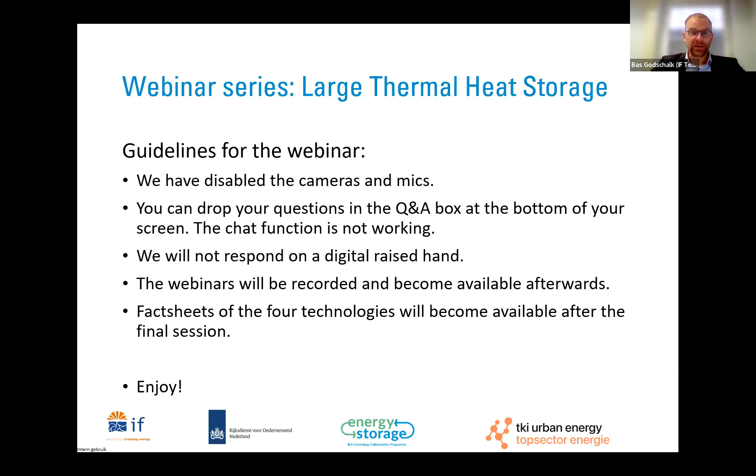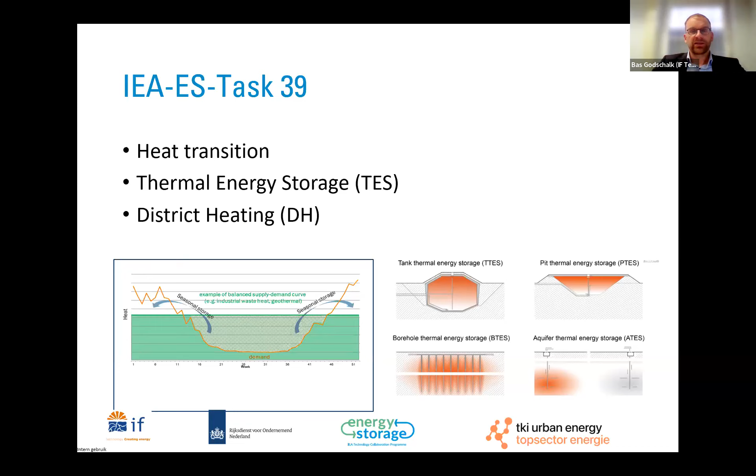This last session deals with the tank thermal energy storage system. In the previous session we went into the aquifer, borehole, and pit thermal energy storage systems, all technologies which are very relevant in balancing the heat supply and heat demand, as you can see in the figure on the left. Our presenters for today will explain why it is important and which role tank storage can play.

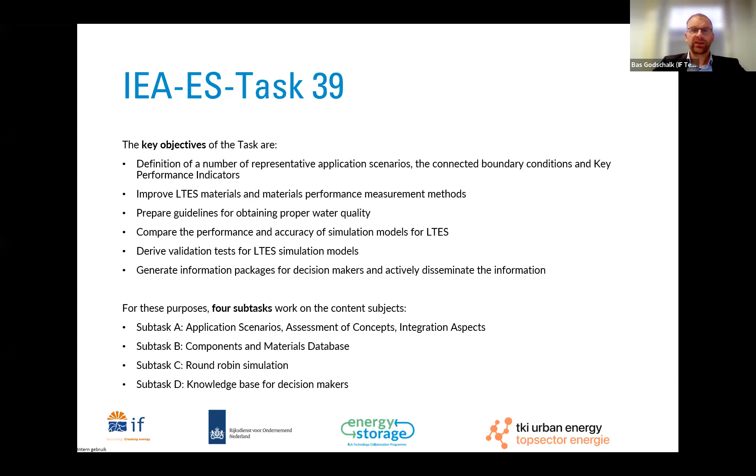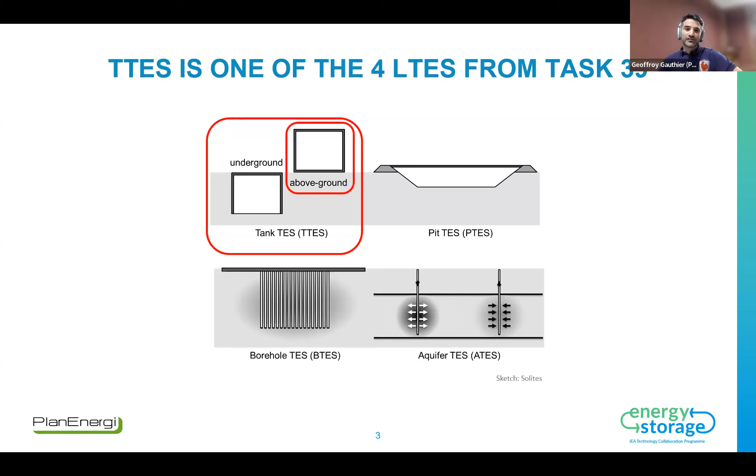Tank thermal energy storage is one of the four main large thermal energy storages, which are defined in our task as sensible thermal energy storages, with no phase change material involved. They are designed to store at least 1 gigawatt hour of heat per year and at atmospheric pressure, so no pressurized systems are included. The stored heat should be suitable for discharge into district heating networks. This presentation will focus on above ground tank thermal energy storages, which is the most common kind, and Ruud will then present underground tank thermal energy storages afterwards, but I will focus on above ground as mentioned.

So what is a TTES? It's basically a giant thermos, and it's built in five main steps. The first step is building the foundation of the tank to make sure that it sits perfectly on the ground. Then you build the roof of the tank, and then you build from the top down, one level at a time.

You build one level, and then you lift it up, and then you build the next level. The third step, running in parallel to the second, is to build diffusers inside the tank to let water flow in and out of it.

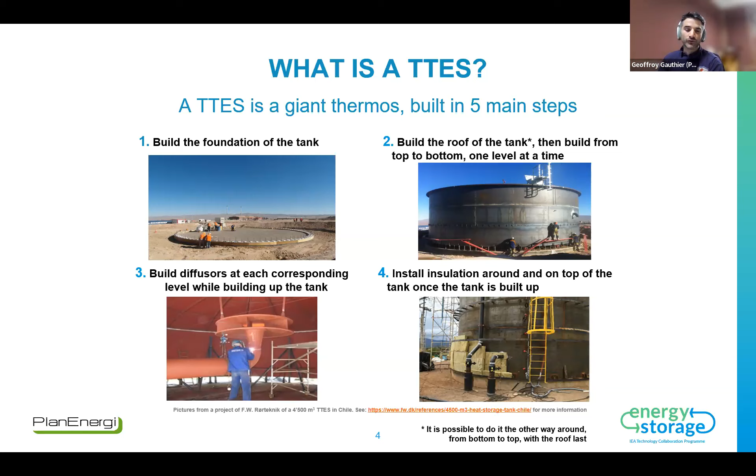Then finally, you install insulation around and on top of the tank to ensure limited heat losses. The last step is to put cladding around the tank so the insulation material is protected, but it's also an opportunity to decorate the tank and integrate it into its environment. So these are the five main steps for building a TTES.

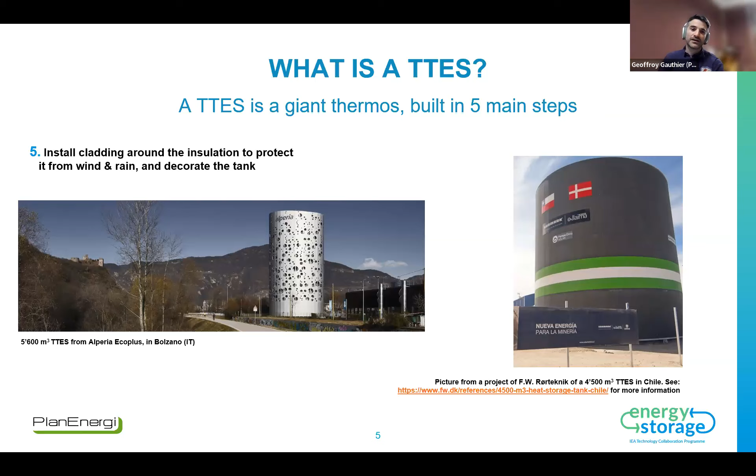In Denmark, and I'll start with the Danish point of view, TTES are basically everywhere and are usually coupled to biomass boilers, waste incinerators, and CHP plants, enabling flexible use of those heat production units. They are connected to big district heating networks.

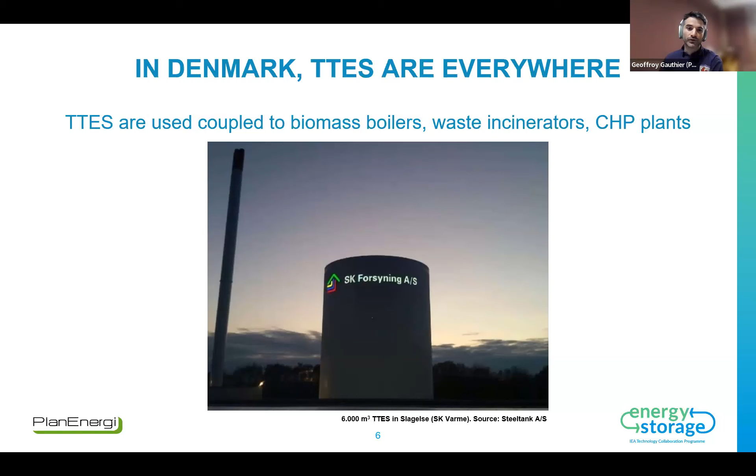That's not the only place we find TTES in Denmark. They're also found in solar district heating systems, which are a Danish specialty. In Denmark, there are 1.6 million square meters of solar district heating collectors installed - solar thermal collectors connected to district heating.

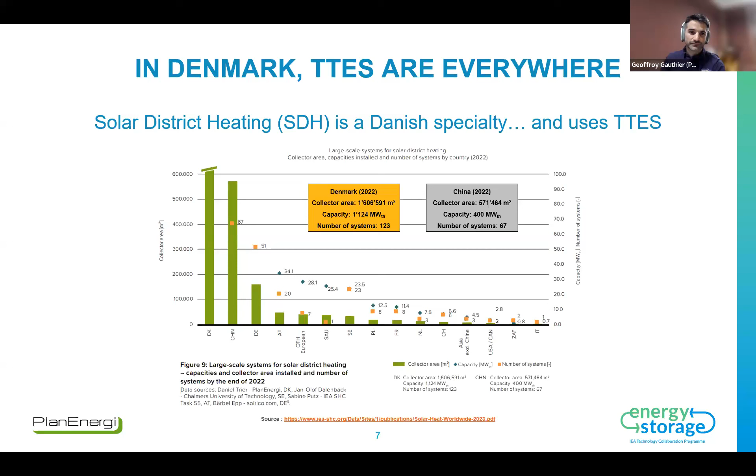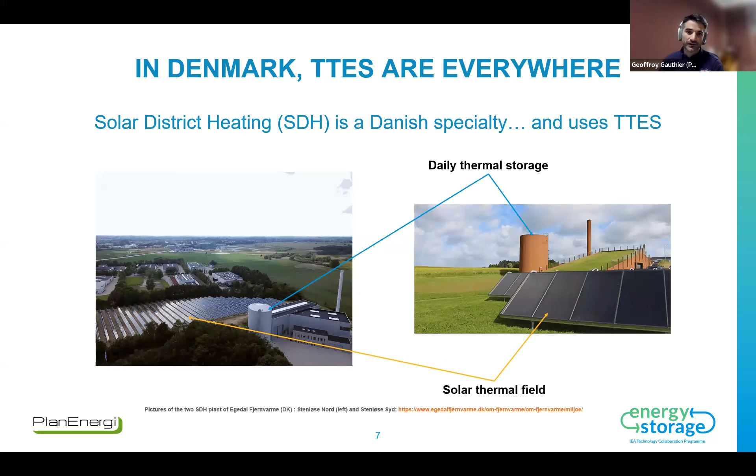It's usually very large installations, and as you can see on this graph, Denmark is at the top here on the left. An installation like this is characterized by a solar thermal field, shown here at the bottom. These are examples of a project in Denmark, almost always with a daily thermal storage to make sure production corresponds to the consumption of heat.

So why large thermal energy storages for district heating? I've mentioned district heating a lot already, but why do we have these large thermal energy storages? Well, first of all, it's because heat is inexpensive to store at large scale - we're speaking of 10 euros per kilowatt hour, less than 1 euro per kilowatt hour at large scale.

Here you see the graph, showing how the specific cost of thermal energy storage evolves when increasing the size. This is for an individual house on the left, 160 liters. If you go to district heating size, several thousand cubic meters, you fall down by a huge factor. This is why it's interesting to go for large thermal energy storages - they're bigger, better, and cheaper.

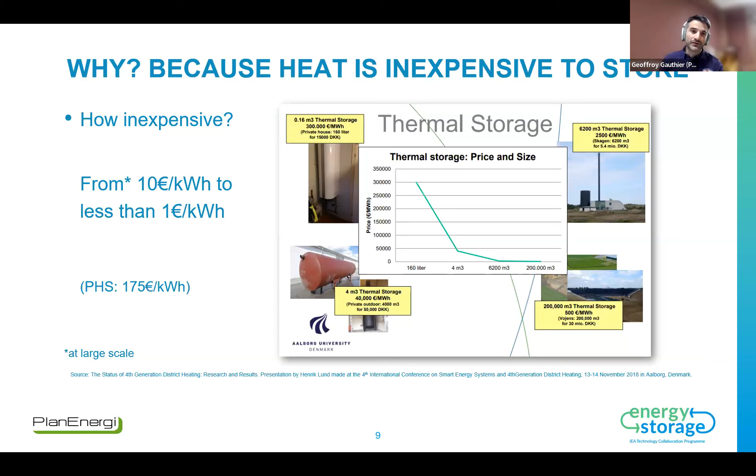In comparison, pumped hydro storage is much more expensive. It never goes under 100 euros per kilowatt hour of storage capacity.

Another point about large thermal energy storages is that they enable the use of renewables. They provide flexibility in district heating systems - I've already shown examples in Denmark. They increase the share of renewables in the system and the use of waste heat. They can help with peak shaving. Larger storages are needed to serve district heating systems and other large-scale applications such as industrial, and they help further reduce specific costs of renewables and primary energy use.

In that sense, there is another task called Task 55, also from the energy storage IEA task. In this task, we've shown that using thermal energy storage, or doubling the amount of thermal energy storage, will help save a lot of primary energy consumption. So in these ages where we're really trying to reduce our consumption of primary energy, it's a very good tool to have.

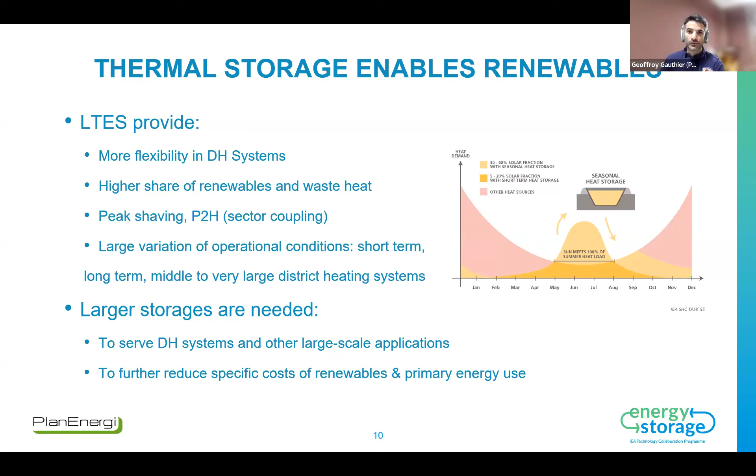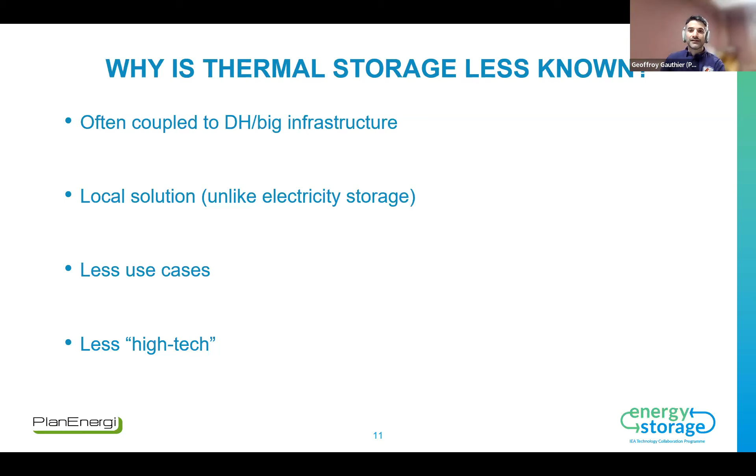Then the last general question about large thermal energy storage: why is it less known? Well, often it's coupled to district heating or big infrastructure, so it's usually far from city centers. It's a local solution, unlike electricity storage, so there isn't much international debate about this topic. There are fewer use cases - one storage is enough to cover huge demand, which is why we see them less, and it's less high-tech. Some would even say it's less sexy, but I would disagree with that.

I think this tank thermal energy storage here in Germany is quite sexy.

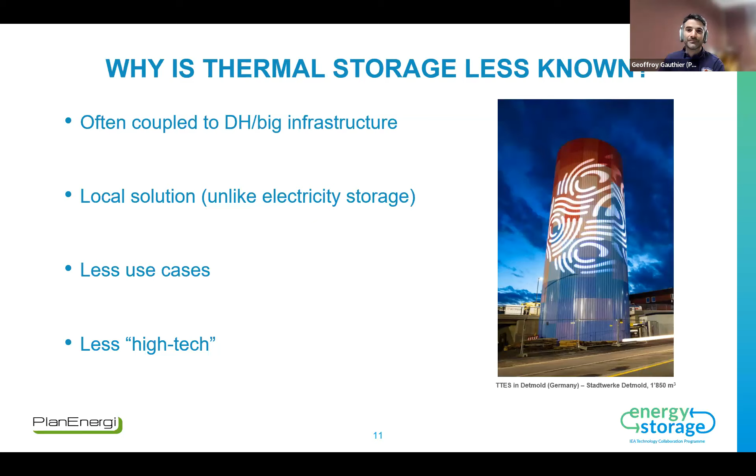Now going to the advantages of specifically tank thermal energy storages. First of all, it's a very simple solution, and it has many advantages. It can run at high temperatures, close to 100 degrees if you have absolutely no pressure, just above 100 degrees if you use steam at the top of the tank, and 115 degrees if you use two-zoned storages, which is a specific kind of non-pressurized tank thermal energy storage.

These technologies are very low maintenance. They have a long lifetime, we're talking about 30 years at least. They have very high charge and discharge capacities of heat. Several hundred megawatts is already possible with this technology. It's very well known, it can be found basically everywhere, and there are little to no restrictions with regards to the underground conditions to implement these tank thermal energy storages.

Of course, you need a ground that is sufficiently solid, but this can be fixed if it's not the case, by building foundations with reinforcements in the soil.

Now, the disadvantages of this very simple solution is that it has a higher specific price than the other LTES that have been shown in the previous webinars. And they also have a visual impact when they are above ground, which is...

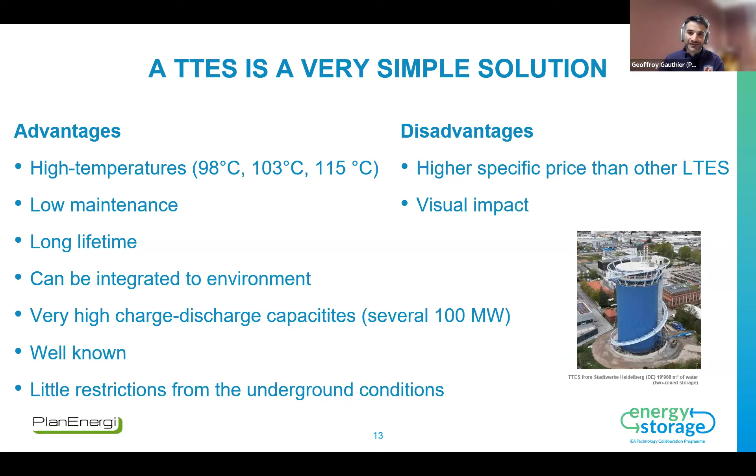Now, going to some details and some use cases for tank thermal energy storages. We have a first example with solar district heating, as I was mentioning earlier, that there's a lot of them in Denmark. And there's also this example of district heating in Berlin.

Going to the first case, in Orlum, this is a typical solar district heating installation in Denmark. It has a solar collector area of 16,000 square meters, a tank thermal energy storage of 3,600 cubic meters, and you can see it here in the back. Then 21% of the heat demand of the local district heating network is covered by this solar heat.

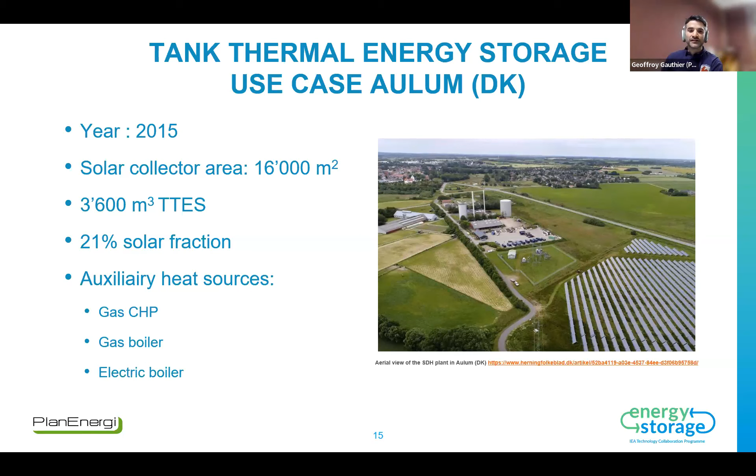In that case, the auxiliary heat sources are a gas CHP, a gas boiler, and an electric boiler. And of course, all of these means of heat production can use the tank thermal energy storage in the winter, for example, in order to have a better flexible use. If you have cheap electricity price, there's a lot of wind, for example, in Denmark in the winter sometimes, then you can store cheap electricity in the form of heat and then reuse it later to do some peak shaving, for instance. So that's the first example that I have today.

The second example is that of Berlin, and it's the biggest tank thermal energy storage that has ever been built. It's 56,000 cubic meters. Normally, the upper limit is around 50,000 cubic meters or even 40,000 cubic meters. So this one is very big.

It has a charge and discharge capacity of 200 megawatts, thermal output and input, and it's designed to make 70 to 120 cycles of charge discharge per year. The main purpose of this TTES is to increase fossil-free heat share on the district heating network in Berlin while ensuring flexibility and security of supply.

This tank is going to be also used as power-to-heat means of storage. So again, when electricity prices will be low, a heat pump - well, it's not only a heat pump, but there will be a heat pump - will be able to store up to 120 megawatts of thermal output.

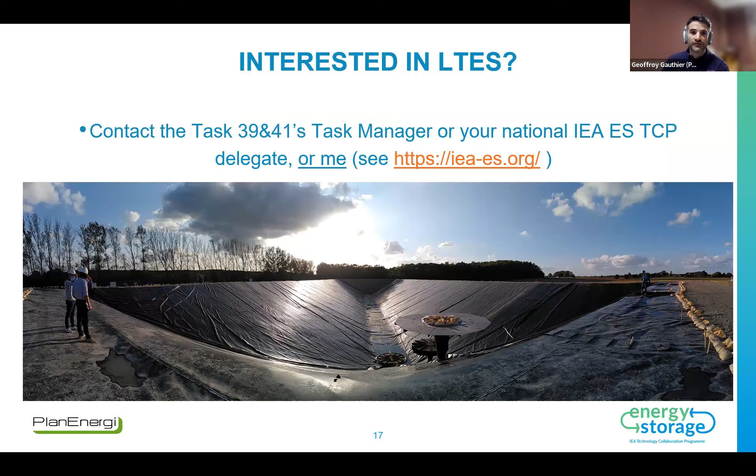Now, this states Danish international activities within LTES. It's actually very specific to IEA-ES Task 39. So everyone in this task has been contributing to this goal.

We will distribute at the end of this task, which is ending this year, information materials for all 4 stages of LTES projects. And those 4 stages of projects are starting with the opportunity phase, where you determine whether an LTES is a good addition to your energy system or not.

And there are several actors that are involved here. Policymakers have quite an important role. Local residents can be involved as well, along with district heating network operators and project developers.

The next phase is the design phase, in which all the technical design is determined for implementing the LTES. Then there's the tender phase, in which everything is prepared to offer tender and get many competitive offers for the LTES, and then finish with implementation and operations. The idea is that Task 39 will provide information materials for all stages of LTES projects, and tank thermal energy storage projects are also following these 4 stages.

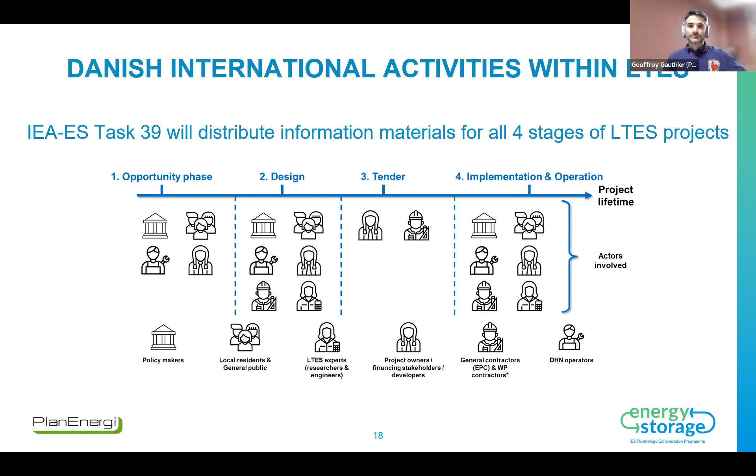Just to give you a brochure preview, here you can see the brochure, which is the first deliverable we have finished in this task. There is a part introducing large thermal energy storage in more detail, giving advantages and presenting the 4 technologies. Then there's a second part about use cases, more focused on giving concrete technical examples, but also presenting the different technologies and their technical limits.

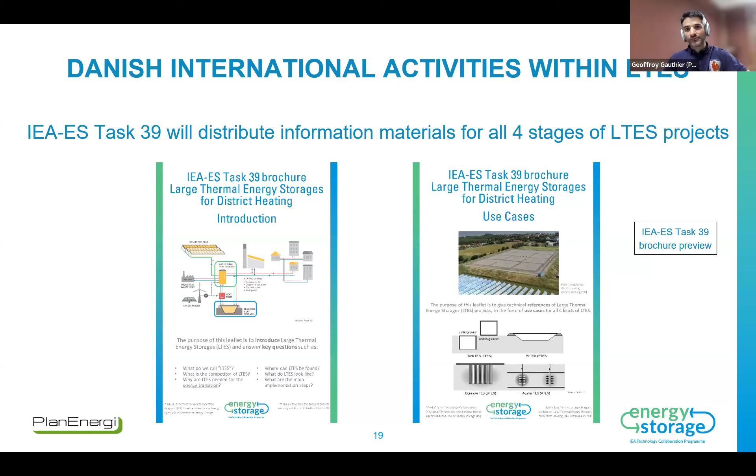So if you're interested, please send a mail, reach out to IEA ES TCP delegates or me, and we'll be in touch. Thank you for listening. I went a bit fast, but then we have probably a bit more time to answer some questions.

Thank you very much, Geoffroy. A very nice presentation, which gives a very good overview. Just looking for my own presentation... Oh, I think that's the wrong one. This one. Yep. Will be very good.

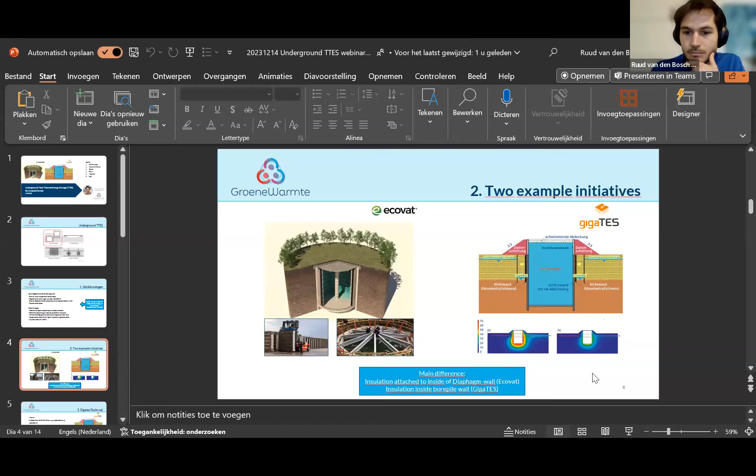Yep, it works. Yes, it works. Right.

Thanks a lot. So my name is Ruud van den Bosch, and I work at Groene Warmte. As you can see in the top right, I have prepared a small agenda overview. We're talking about underground storage, tank storage, in this part. Geoffroy already mentioned above ground storages, and there are some developments in the Netherlands and in Europe to look at underground storage, underground tanks. This has a lot of similarities, but also some differences compared to above ground.

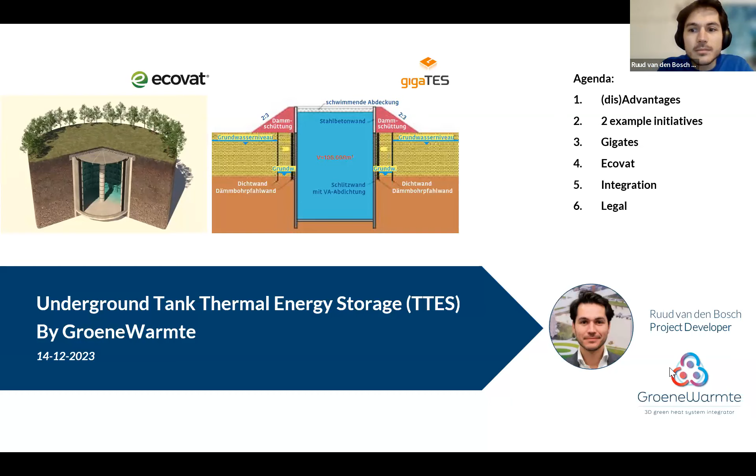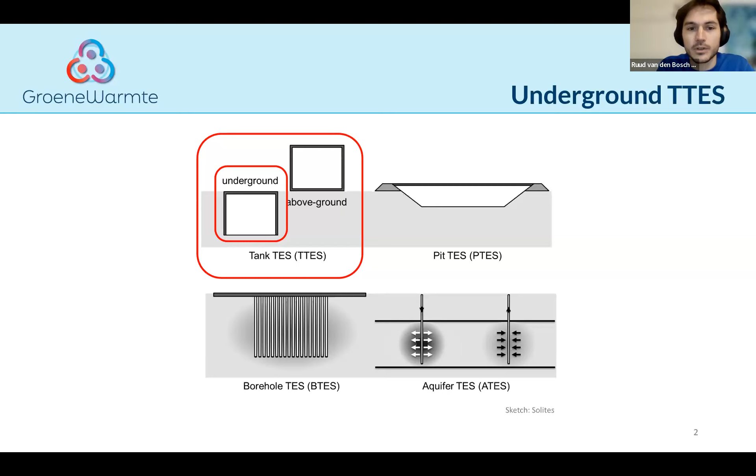So using the same overview of the four main large thermal energy storage systems, we have the tank, and now we'll focus on underground tanks. Following up on Geoffroy's presentation about the general advantages of tanks, I won't go into that again, but going underground has some advantages and disadvantages compared to above ground. The main reason usually is to have a smaller visual impact after construction. This applies when large volumes need to be integrated within a district heating system, and the location is within a city or urban environment where high volumes of above ground storage are not very suitable. The other thing is that it's also possible to make very large volumes underground, whereas above ground storage volumes are somewhat limited.

The Berlin case was very big, but there is a limit to that. Once you want to go bigger, you probably want to have it underground. Then it also starts to look a bit more like the pit storage technologies presented in the other webinar.

When storing underground and large volumes, it usually also becomes possible to store for longer periods, and you'll have less losses due to the soil temperature. It's usually warmer in winter than outside temperature, but also there are less convection losses due to winds blowing against the above ground tank compared to the underground tank.

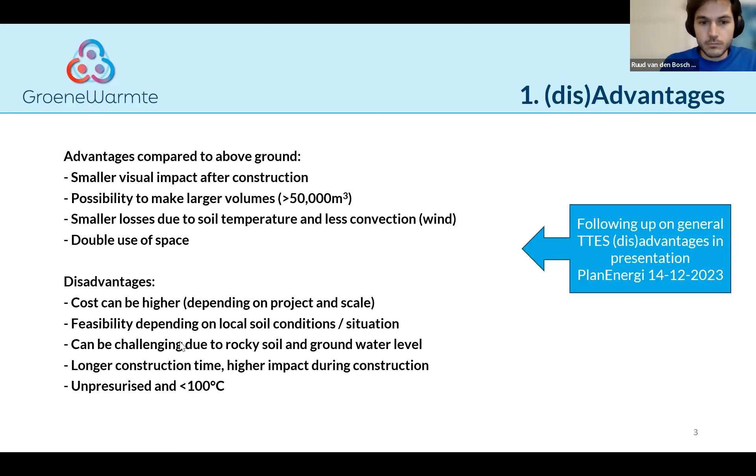This presentation will show two main example initiatives: the Ecovat and the GigaTES project. The Ecovat project is a construction principle based on prefabricated elements, and the GigaTES is based on having insulation inside a bore pile wall.

And I know there are also variations on this concept, and those are all being studied and looked into. However, this is also one of the possibilities.

The Ecovat principle has a diaphragm wall for the construction, and the insulation is attached to the inside of it. There are lots of different terms most people probably never heard about before, so I will briefly explain them in the next slides to elaborate on how that works.

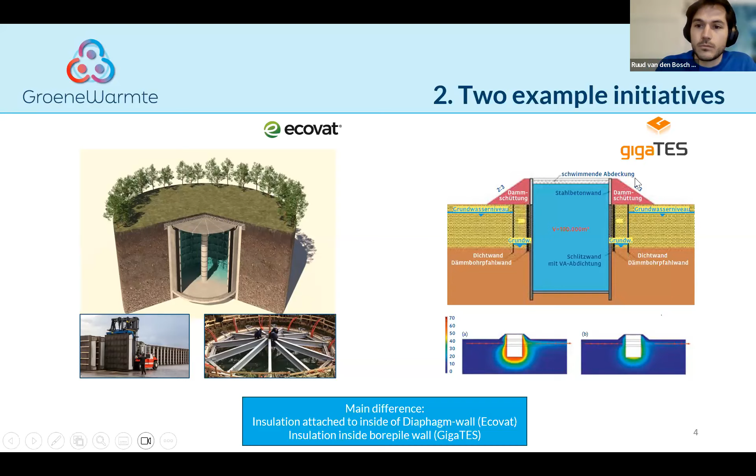So the GigaTES project is at the moment being studied further near the area of Vienna. The project first had been going on from 2018 till 22, and now is having a follow-up, which is called the Scale-Up project. So the name GigaTES refers to the first period, and below in the links, which we'll share in the slides later, anyone can look it up and see the latest status of those projects.

The volume in the GigaTES project for the tank that was looked into was 100,000 cubic meters. That's a very large volume. And the roof was a floating roof. This is comparable to the pit storage floating roofs that have been discussed in the other webinars.

Then there was an option for insulation. This was done using hollow bore pile walls, which will be filled with foam glass gravel. Foam glass is basically a glass, so a natural material, not harmful for the environment, and it has some unique characteristics, namely that it does not absorb water, unlike normal insulation for your house, which means it will keep its insulating properties over time, even while getting moist or wet. It is also able to withstand higher temperatures and high pressures.

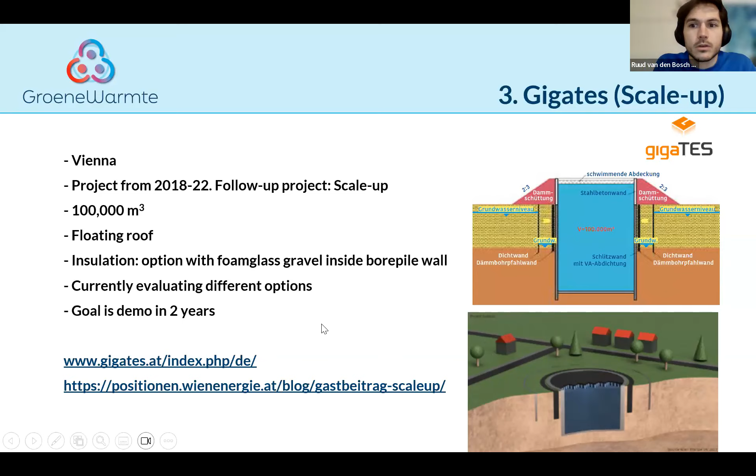Then the Ecovat project. I'm a little bit biased because I know a little bit more about this technology, so I'll also be able to explain a bit more about it. And if there are more questions on the GigaTES project, Geoffrey might be able to answer them as well.

The Ecovat has been in development since 2013, and a small demonstration was built in 2017. Right now, the optional volumes are between 10,000 and 100,000 cubic meters.

The design has a supporting roof, not a floating roof, which means it has a central column in the middle supporting the roof, with beams and concrete slabs on top. The insulation is attached to precast modules, which basically consist of concrete attached with foam glass insulation.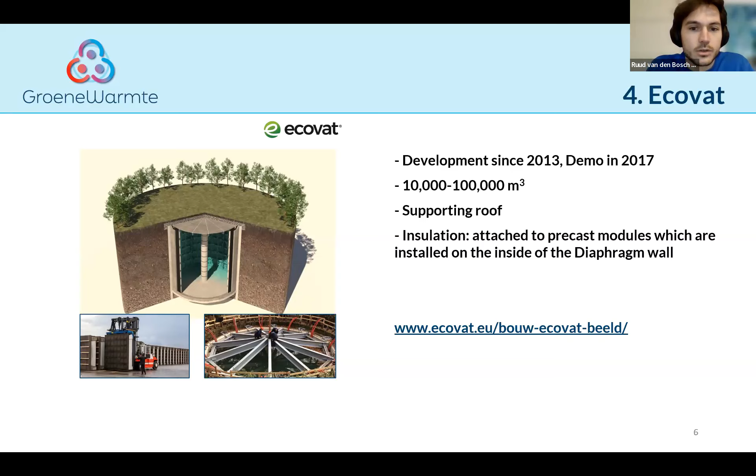I have a few more slides going into the construction principle. The construction also has 5 steps, coincidentally just like above ground. It doesn't start with a foundation — in the end that's not necessary, since the net downward pressure of the tank is basically the same as the previous soil. So the main challenge is making sure the tank doesn't collapse from the pressure of the outward soil, and this is the function of the diaphragm wall, which is a concrete cylinder.

I have a slide on the diaphragm wall next. Once the diaphragm wall is built, the tank is excavated. The tank can be full of water at that point or still dry, depending on the local situation. Then a concrete bottom is cast, the precast modules are installed, and then the roof is made.

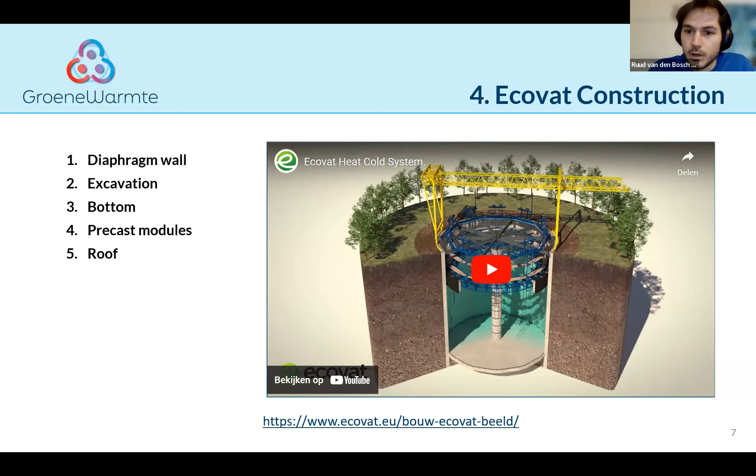A diaphragm wall, or D-wall, is a very common construction technology used for underground parking garages and subway stations, so in many countries there's experience with this. These designs are usually made to last a very long time, with at least a life expectancy of 100 years, for preserving those stations. The walls are watertight and suitable for deep constructions, such as these.

If you want to know more about how these things exactly work, there's a lot of information and videos about that on the internet if you want to dig a little deeper.

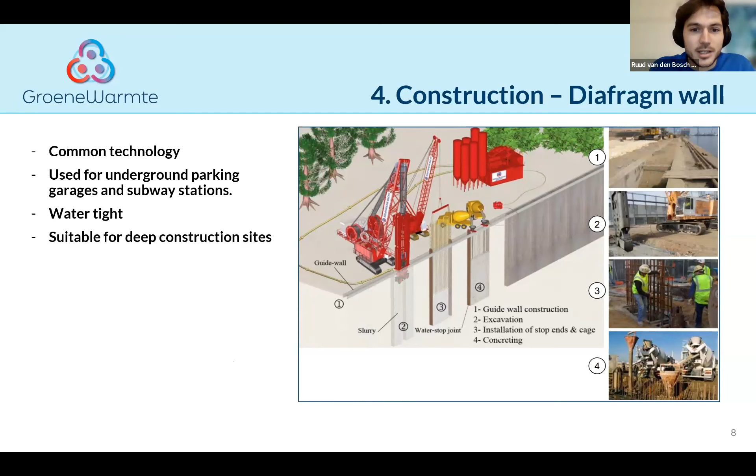The precast module is a homemade innovation of Ecovat, and its main purpose is to fix insulation inside the tank and have it there forever, basically. Here too, foam glass insulation is used, shown by the black part. These modules have roughly 30 centimeters of insulation, and are made in a controlled factory with very high precision, which ensures that during construction they can be put together very securely without any deviations.

The concrete attached to the insulation is there for the structural stability of the module, but not for the structural integrity of the tank — the diaphragm wall is there to keep the tank safe and structurally sound. The concrete also functions as a downward force on the insulation, to prevent it from floating in case there's a high groundwater level in the tank, so that the elements would be underwater.

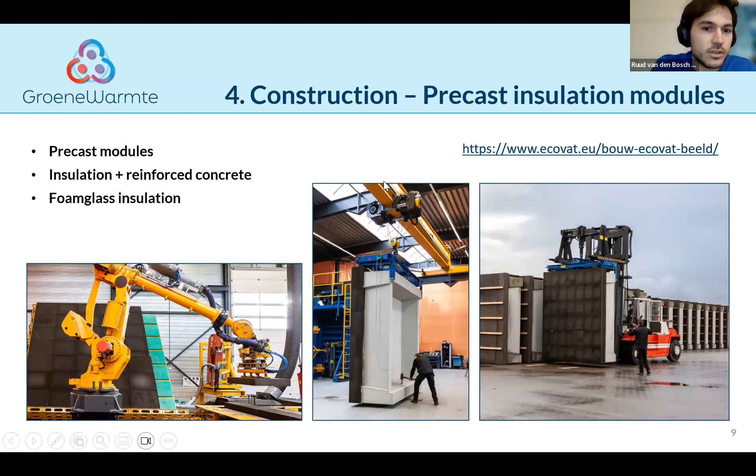The first demonstration built was a relatively small volume, but the proof of technology and construction was thereby proven, so bigger sizes work on the same principle with precast modules. However, there were some improvements made after the first tank: a better roof design, better module design, and better diffuser design.

The diffuser, for those who don't know, as Jeffrey already mentioned, is the inlet nozzle connected to the piping, which handles the inflow of cold or hot water into the tank to store it or to discharge it.

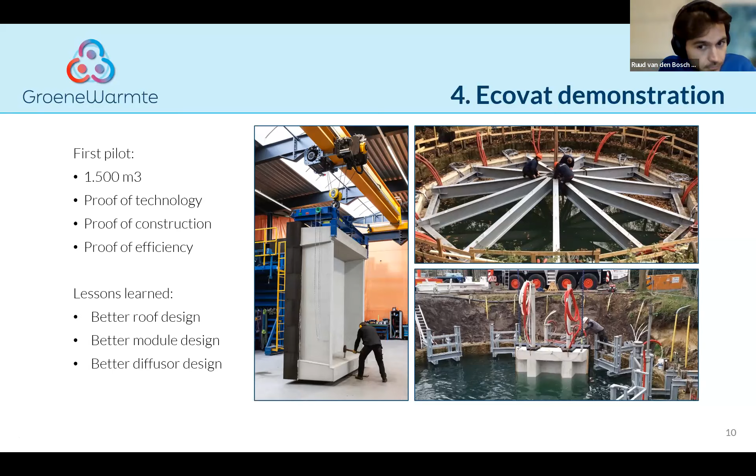There are several projects being looked into, one of which I can't disclose the location or name for, but a feasibility study was done more than a year ago, and we're looking into the next steps. The tank volume is 60,000 cubic meters with about 100 megawatts of power output, making it roughly a weekly storage tank for large district heating applications.

There were some questions in the chat before about what is the storage duration of tanks. Usually this is a daily storage, such as with solar heating, or to provide the morning or afternoon heat demand peak in the district heating.

While at this moment we see more and more integration of renewable power on the grid, such as wind, some district heating systems are looking into weekly storage to also include the wind profiles of renewable low-cost power, combined with power to heat and storage to include this in the systems. So that's the application here.

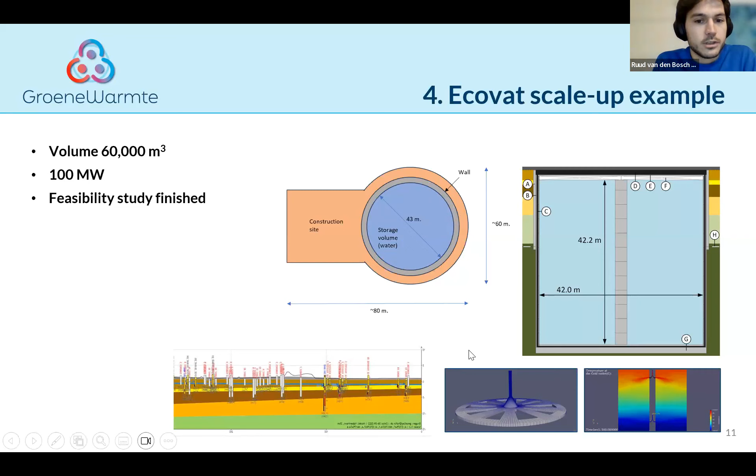Something about the integration of underground tanks. The underground tank is an unpressurized tank, and usually district heating systems have a much higher pressure system. This introduces the need for a heat exchanger between the tank and the system, as you can see here, part E, and it also requires a pump facility with a pump named P. This also makes sure that the heat quality and pressure in the district heating system can be maintained.

As with underground storage tanks, the water quality cannot be maintained on the level of above-ground storage tanks. The pump station required needs to be near the tank, and it needs to be partially submerged, so the pump is basically below the top water level of the tank.

When looking at application and integration, most of the tanks designed are used for daily or weekly storage in large district heating systems. But the future goal, for the giga_TES project and the Scale-up project, and also for the Ecovat project, is to go towards seasonal storage. However, at this point the costs are usually too high to make a feasible business case out of it, while for weekly storage there seems to be a business case in most large district heating systems.

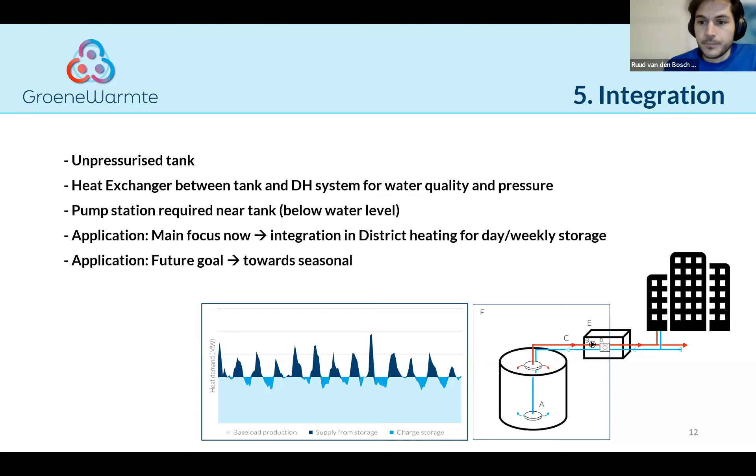I think personally the way forward is to improve the technology and have experience in weekly storage applications, and then see from there how the technology can evolve. When you have other alternatives for seasonal storage, such as ATES or PTES, those are probably the preferable technologies for seasonal storage at this point.

Something about the legal part: you always need to take into account when looking at a location that there is no contaminated soil, otherwise there will be extra permitting and extra costs included to clean the soil that you excavate. There have to be studies done on the groundwater effect, on the temperatures it creates, and the possible microbiological reactions, but that's also the case with other underground storages.

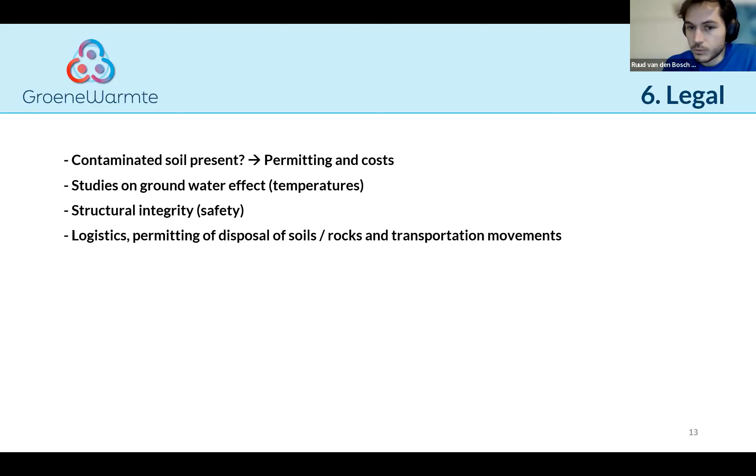Most importantly, structural integrity - the construction principles should always be safe. And then think about permitting, logistics, disposal of soils, rocks, etc. So yeah, that was it. If you scan the QR code, then you can reach my LinkedIn, or just send me an email if you want to know more.

Okay, thank you very much, Ruud. Very interesting and also very visual, so that really helps us get a good impression of the technology. And I see in the chat many very practical questions, so I think it will be good to go to that.

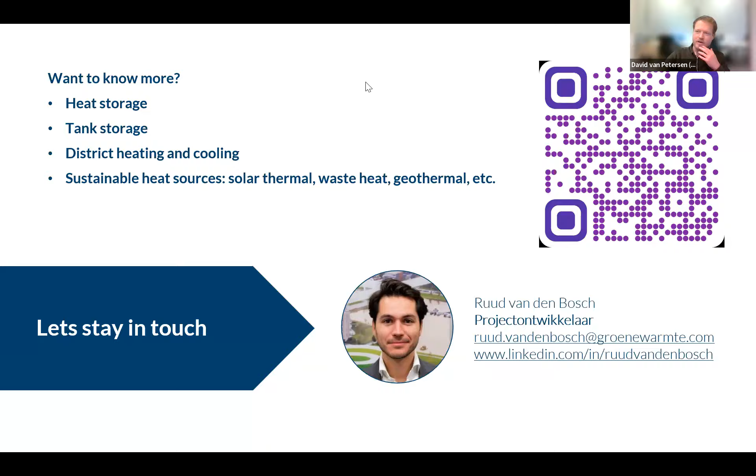Thanks for the questions, Ruud. One of the first questions that popped up was about insulation - whether or not there's insulation at the bottom of the tank is what some people were curious about.

There's two options. Speaking for the EcoVault principle, I know there are two options, whether to include it or not. For the GigaTES project, I don't know. Let's say, when there's a low groundwater level and you can have a dry tank, then it's easier to install insulation on the bottom than when the tank has a higher groundwater level and is always full with water.

Yeah, good, thanks for that as well. One thing I was curious about - and obviously it depends on the size of the system and how many are being developed - but could you say something about the prices for these installations?

That's going to be hard, and it's very dependent on size and soil conditions. For example, rocky soil bottoms make a very different cost than soft soil. But if anyone has a location and a desired size of tank, it's not a sales target here, but we can really easily provide a budget within the day about what we think it will roughly cost.